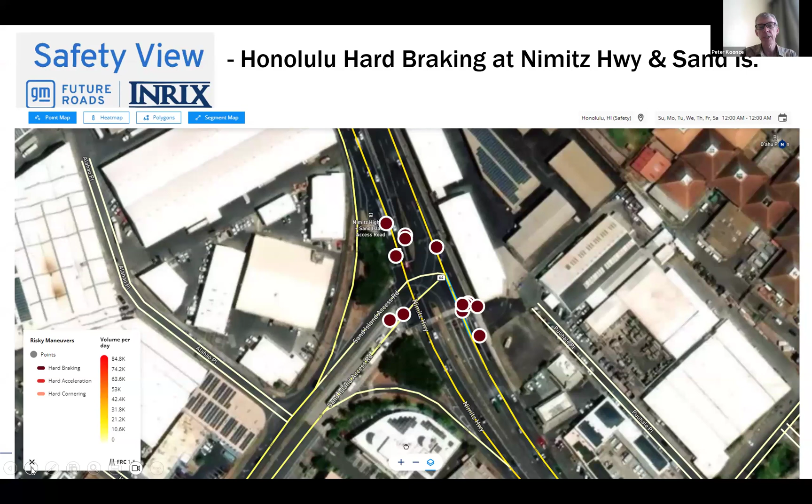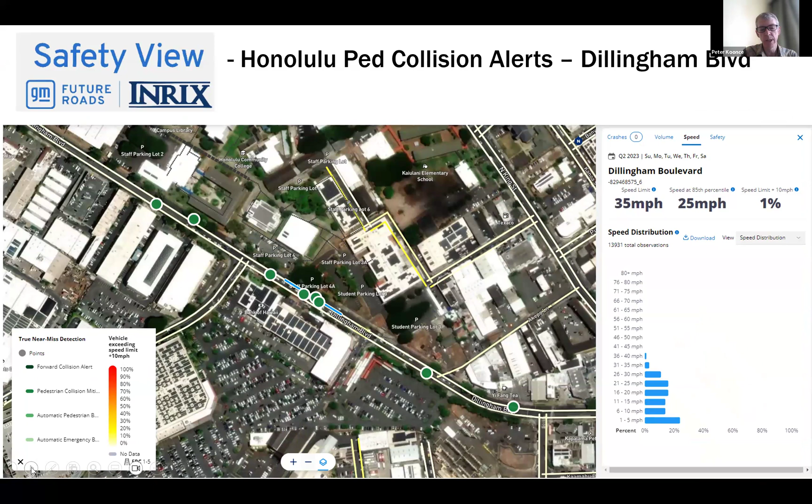The other interesting part about that is the data that comes out of autonomous and connected vehicles. So we're pretty excited about watching this and seeing how we might use that to benefit our intersection treatments in the future. The notion of where speeds are too high and how we might address that with changes to the roadway is just another one of those gee whiz moments where I think there's some fantastic opportunities to advance pedestrian safety if we have better data about what the conditions are and where risks are highest.

The NTSB report talked about that. And so this is something we're pretty excited about: the work that the National Committee did to look at this document, set up a task force, and then rewrite the language in the speed limits chapter. So section 2B, if you haven't looked at that yet, actually, I think NACTO has a webinar on this that's going on right now.

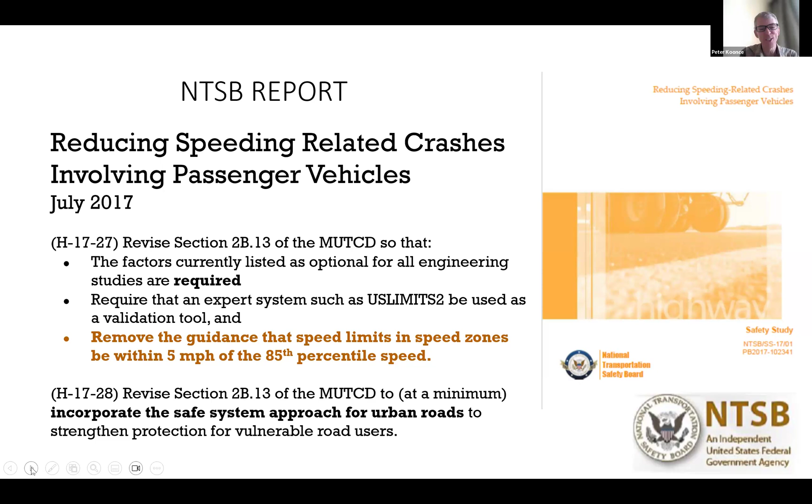So if you are thinking about working with your engineering community or actively working with them, ask them to take a look at the speed limits and think about updating some of that information on the streets and as you go about your daily work. Because that can be huge in terms of improving pedestrian bike safety. Thinking about how, again, we use the language there that provides more flexibility, increases consideration for pedestrian and bike travel.

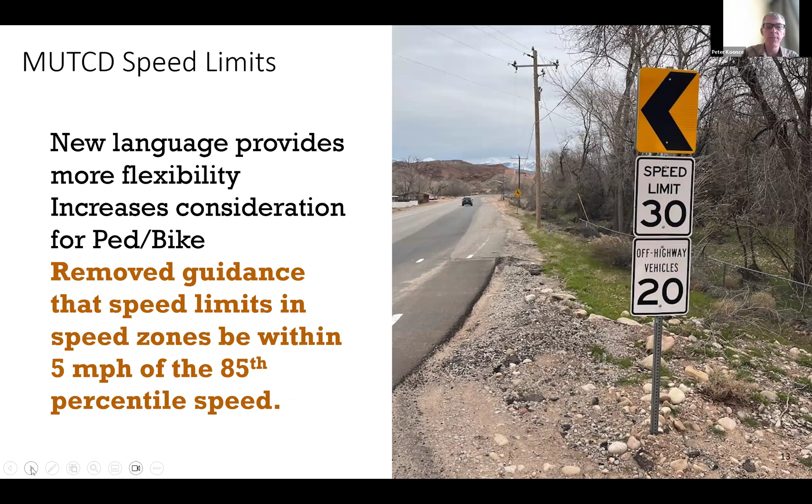This notion of how we go in the future to address issues, this notion of bike lanes shall not be to the right of a right turn only lane, that's an issue that's still being resolved. If you think about the nature of this sort of a treatment, in this example from Portland, where we said, oh, wait a minute, this striping, it's a mistake that runs in violation to the MUTCD. But what we found when we did more investigation is that we didn't really have a strong basis for why this is the case and why a bike lane to the right of a right turn lane would be banned in all cases. If that's a low volume movement, maybe that's an okay treatment.

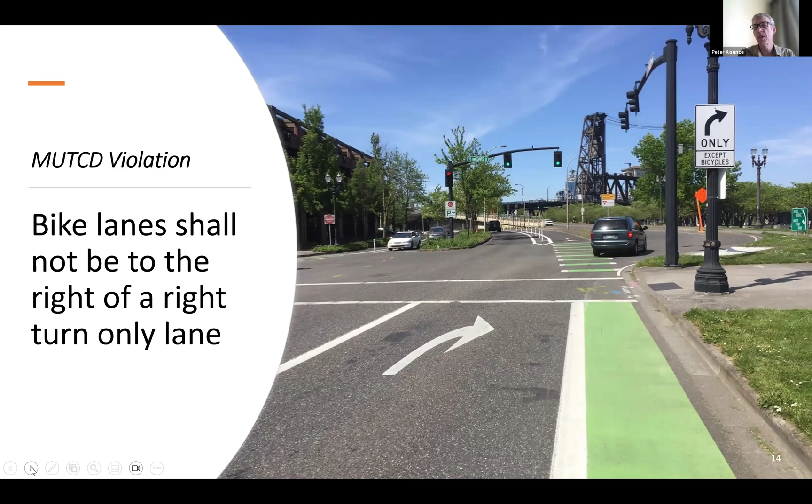So thinking about challenging the status quo, at least thinking about, can we do an experiment to address whether this bike lane treatment that's a pocket right turn lane, is that truly the safest application that we can think of, or does that then impact the comfort of our users? Here's a compliant example where, again, the bike lane is adjacent to the vehicle traffic, sandwiched between the bus and the vehicles. Is that the right design that's going to get us to our multimodal goals and improve safety for all? I think it's still a question that's worth further exploration.

So again, just to set the stage for a series of great presentations, I want to just reflect that if you think about Portland and our climate action plan, I like to say that the MUTCD may not reflect local policy. It doesn't get us to where we're going. PROWAG, huge issue for us. We're going to watch that very closely, and there'll be more on that in the coming months and years. And then again, this notion of there's some bias. I like to say cities aren't always involved in the research, so we have to work with our partners. And we've been very active with Oregon Department of Transportation, and they've been very supportive to moving a multimodal safety effort forward. That's the end of my presentation.

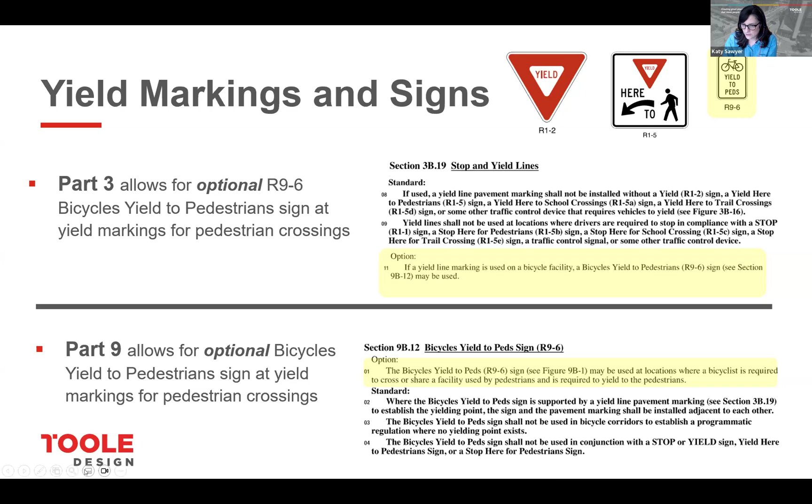So Part 9 now allows practitioners to use a smaller yield to ped sign on those bikeways. And you'll find that both in Part 3 for stop and yield line markings, and then it's also included in Part 9 as well in the bike section. And the draft 11th edition included how that may be used. So a transit island is a great example where you would be expecting a lot of pedestrians to be crossing the bikeway, and you really just want to let bicyclists know that they should be yielding. So now you can use this optional yield to ped sign.

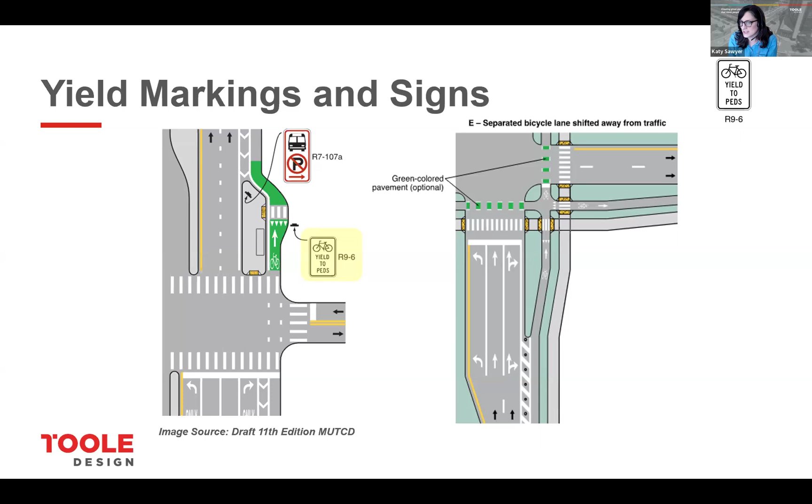That will also impact the design of protected intersections as well. A protected intersection is shown in the 11th edition. However, it's largely silent on how you may treat things like the assignment of right-of-way and traffic control as well. But if you live in a state that allows that yield condition at crosswalks and not stop, you could also use these yield to ped signs at those protected intersections.

Another change, one of the good things is Part 2 does add bike symbols to the yield or stop here to pedestrian sign. So practitioners can use a single sign to alert motorists to yield to both bikes and peds when you have that bike facility present. The bad news is that Part 9 does not incorporate that bike symbol into the turning vehicles yield or stop for pedestrian signs. A lot of agencies across the country have been wanting to combine the bike and ped symbols on that sign. Many are, whether through the request to experiment process through FHWA or just doing that on their own. Obviously, these typically get mounted at an intersection that has a lot of sign clutter going on already, and so you want to try to consolidate those signs to the greatest degree possible.

Part 9 allows for the use of this new sign, the left turn yield to bikes, down at the bottom of the screen. So you do have the option of adding an additional sign, but unfortunately combining those symbols at this point, you'd still have to go through that request to experiment process.

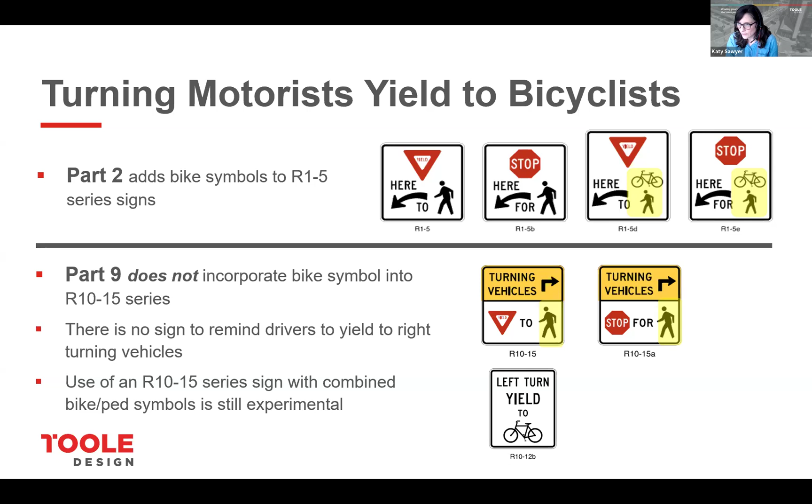As Peter mentioned, the right turn lanes to the right of bike lanes, the 11th edition does require you to phase separate any bikeway that is to the right of a right turn lane. The draft edition actually made it so that for a separated bike lane, it advised against it, but it didn't necessarily preclude it. The 11th edition has revised that draft language in such a way that it's slightly ambiguous, and the problem lies in the definition section of the MUTCD, where a separated bicycle lane is considered a subset of a bicycle lane. So when you look at the language in Chapter 9, it really says that for a separated bike lane, you can't have a right-only lane without phase separation. So something for practitioners to be aware of.

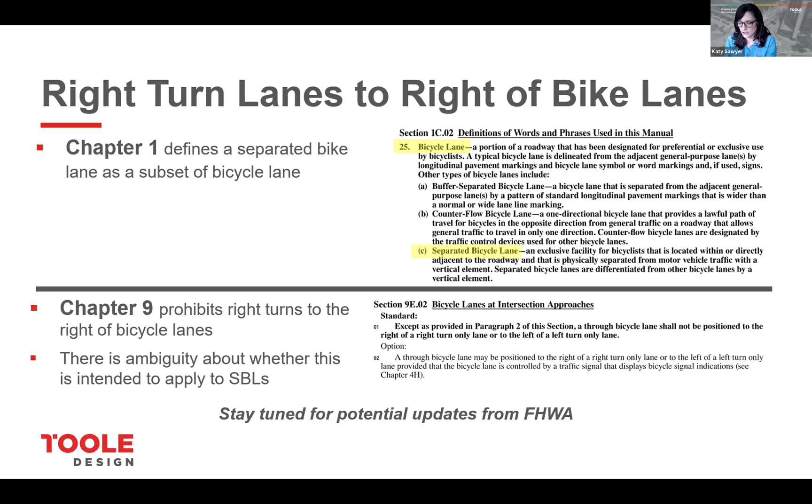I know the National Committee, as well as other sponsoring organizations, are very well aware of this, and I do think FHWA will be issuing some sort of interpretation of this language, or maybe even a revision to it at some point in the future. I can't guarantee when that will be, but it's certainly on everyone's radar that this was a change from the draft edition, and trying to clarify whether that was intentional. Good news is that when you do provide a right turn lane, when you have that space to provide the right turn lane to the right of a bike lane, these scenarios are now in the MUTCD.

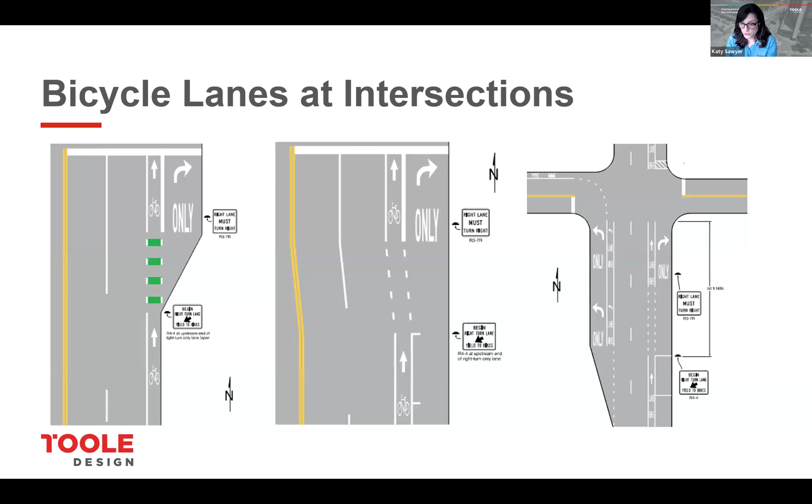So you have those standardized pavement markings and signage and guidance about what sort of traffic control to use in those situations. Buffered and separated bike lanes. Separated bike lanes has been added to Part 9. It's a kind of minimal section, I think, but also the MUTCD is not a design manual, so sometimes less is good to allow designers the flexibility to design bike facilities that they feel are safe and serving all modes.

One thing I will point out in the separated bike lane section is that there is a standard statement that requires that along a separated bike lane, you do restrict all right turns on red. So that's something that's important for practitioners to remember.

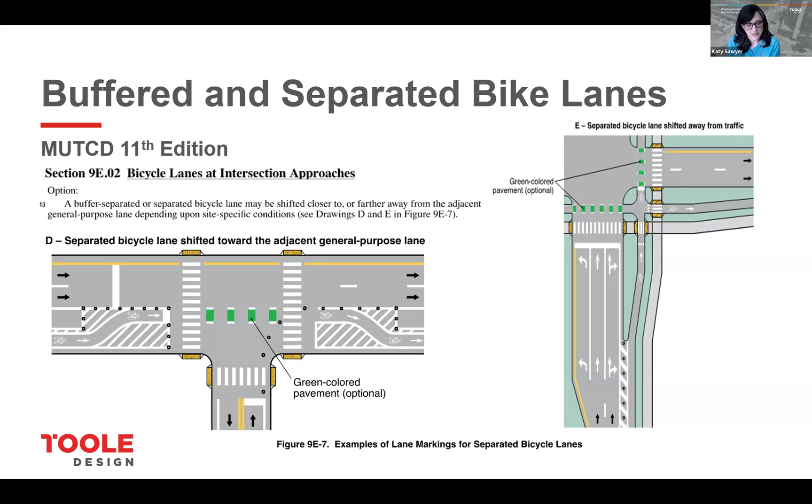And one thing that I thought was a little interesting, there's a section for bike lanes at intersection approaches, and it says that you can bend a bike lane in or out, meaning you can bend it in towards the travel lane or out towards the edge of roadway. And we know that they're not the same type of treatment. It's not a design manual, so there's no information on this, but as practitioners, we do know that there is a huge benefit to bending bike lanes out.

An offset of 6 to 16.5 feet has been shown through research to really improve the safety for bicyclists. It reduces those crashes. And so I think it's important to note that while they're kind of presented as you can do either or, practitioners really need to remember that it's important to maintain and maximize that buffer space between bicyclists and motorists to allow motorists more room to yield. And I think an important thing too to note is that you should be looking to the latest design guidance and not necessarily just the MUTCD on its own when you're trying to design these sorts of facilities.

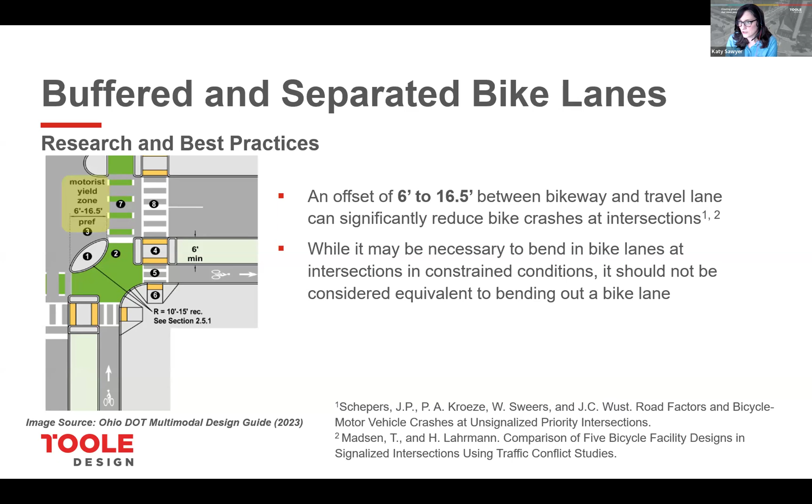Green colored pavement markings are no longer an interim approval. They've been incorporated into the 11th edition. I know a lot of people were waiting with bated breath with shared lane markings and how they could be enhanced. The state of California in particular has a long history of requests to experiment regarding the green-backed sharrows, shared lane markings, or super sharrows. And so a lot of people were waiting to see how FHWA would incorporate those. And this one, I have to admit, came out of left field a little bit. You can now use black pavement markings underneath your shared lane markings.

This example from here in Pittsburgh, I think you can see when you have an asphalt street, if you were to provide black pavement markings under a shared lane marking, motorists probably aren't going to really pick that out compared to just the white pavement markings. From a maintenance perspective, it may last longer, so that's good. But I will say this was kind of a surprise.

I'm not aware of black-backed shared lane markings anywhere in the country. I'm not familiar with any research around this practice as well. And I suppose if you really wanted to, you could request to experiment with the green-backed sharrows still. But I think FHWA has likely made their opinion pretty clear here that they are not in favor of the green-backed shared lane markings.

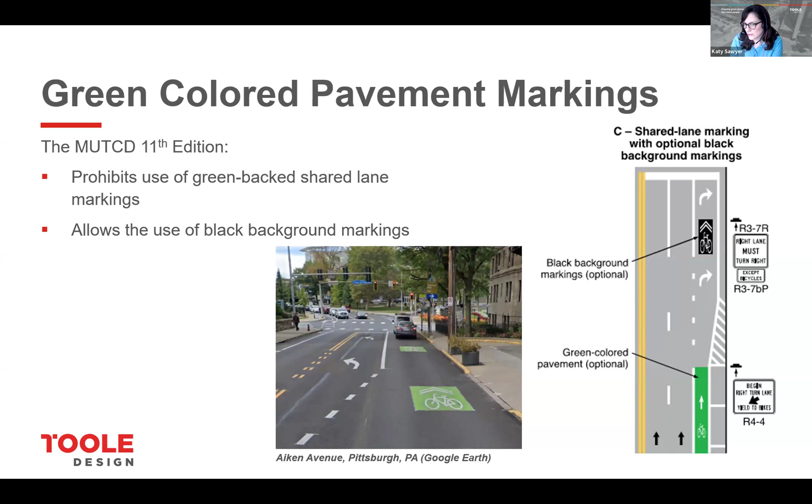Bike boxes have made the jump from Interim Approval 18 into the 11th edition. One thing from that interim approval that made its way over is that when you use that bike box across multi-lane approaches, ostensibly to get bicyclists to a left turn lane, you must have countdown pedestrian signals. That has stuck out to a lot of people for that interim approval. But I will say, I also think in that scenario, practitioners are installing two-stage turn boxes instead of extending the bike box all the way to the left turn lane. But that's something important to remember when you're using that treatment type.

Some things that are new that weren't in the interim approval is that since you're moving the vehicle stop bar, the general travel lane stop bar, away from the intersection, you must recalculate your yellow change and red clearance intervals, which makes sense, but it wasn't included in the interim approval. So make sure that you're looking at that when you are installing bike boxes at a signalized intersection.

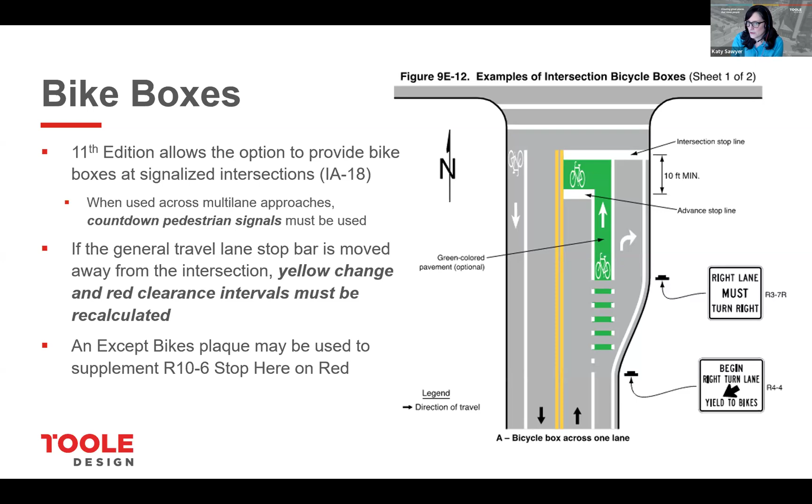And then another thing that's new too, I had never really thought of this as being an issue before, but if you have that vehicles stop here for the stop bar, you can now put an except bike plaque underneath that stop here on red sign. It's interesting to me because without the advanced stop bar going across the bike lane, I don't think that there would be a confusion about where bikes stop, but you have that option if you like. And then also two-stage turn boxes have made the jump from Interim Approval 20.

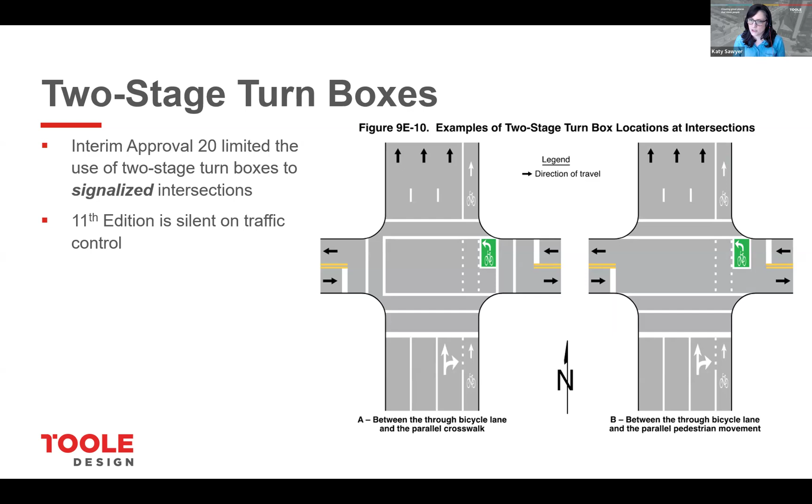And for interim approval 20, it explicitly said you could only use them at signalized intersections. The 11th edition is silent on traffic control. And I think that's intentional. I think that we're seeing these two-stage turn boxes used in a lot more scenarios than just signalized intersections. As we start to incorporate more two-way bike facilities, we can use these to get more creative on how to get bikes into and out of those facilities.

This is a section that took me a little while to digest and really understand, but two-stage turn boxes live in both the marking section and the sign section in Part 9 because they do have both of those pavement markings and signage. The signage section to me is a little confusing, but ultimately what it comes down to is that if your bike facility is approaching an intersection where the general travel lanes can't turn, you need to let bicyclists know that they need to stay in the bike lane.

So in those scenarios, you are required to use the R9-23 series signs, and they are very specific. There's a specific advance sign that you need to use, and then you need to use two different signs at the near side of the intersection and the far side of the intersection. If turns are allowed for everyone at the intersection, bikes are obviously permitted to leave the bike lane and take a left turn lane, for example. So these signs become optional.

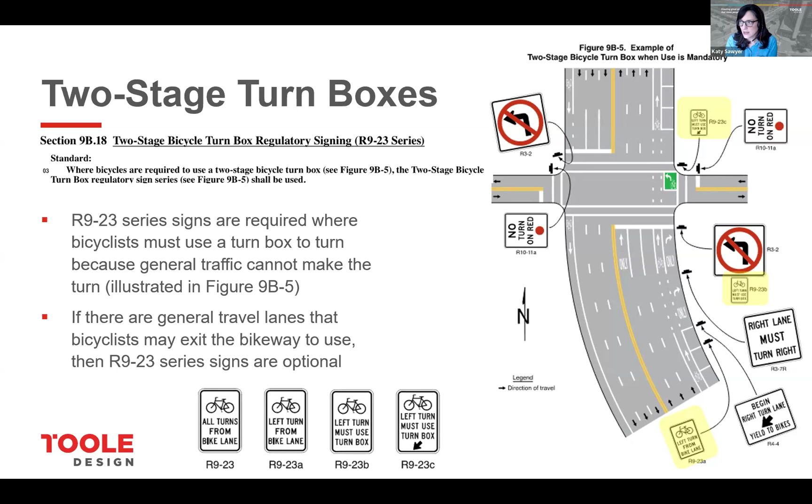This figure kind of helps with the text. It's an interesting case because I think if you have a 6-lane arterial street, it's questionable that you would have a conventional bike lane. So sometimes that can be a little overwhelming. But I do think the figure helps when you're reading the text to really understand exactly what the requirements are here. And then interestingly, right after that section, there is a new bicycle jug handle section.

Again, I wasn't really aware of this being an issue in the past, and it's a very large, kind of confusing graphic with a lot going on. Ultimately, they're talking about, like this example here in Pittsburgh again, a bike bay. You have a T intersection and you need to have some space outside of the roadway where bikes can turn to be able to use a signalized intersection.

In this case, the section actually says that if bikes are required to use this turn box, this two-stage movement, the signs are optional. So even though it's kind of the same scenario as a two-stage turn box, it's a different requirement. Also, interestingly enough, they have, I actually need to count them, 2, 4, 6, 8, 10, 11 regulatory signs to control this very specific situation. So I thought that was pretty interesting.

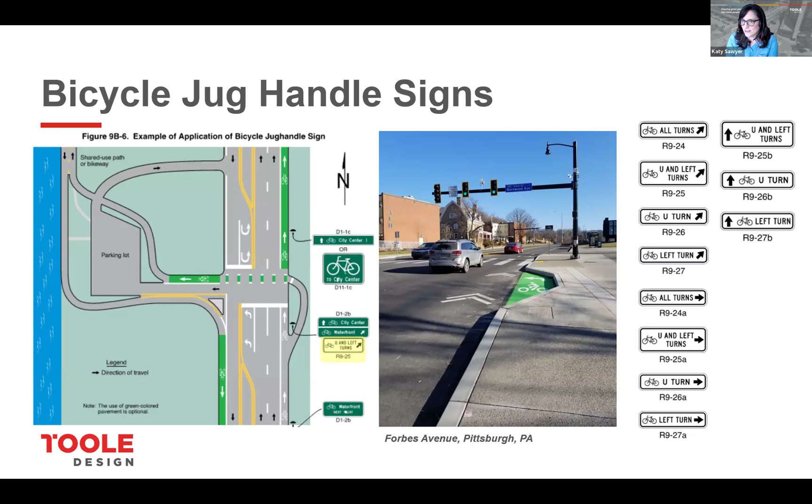And then finally, counterflow bike lanes have been incorporated, which is a huge win. But there are some issues, I think, or maybe some missed opportunities here. The first one is that I know a lot of agencies, when they install a counterflow bike lane, they like to take those existing one-way signs and put an except bikes sign underneath, especially in an urban environment where you have a lot of sign clutter and utility conflicts and you're not sure where to put new signs. That is really the easiest way to accomplish alerting motorists and bikes of how the traffic operations work.

Part 9 requires you to use movement prohibition signs. So you have to put that no left or no right except bikes. And then Part 2 has the one-way signs. And when you think about it, these have to overlap essentially when you install a counterflow bike lane. So it's really going to contribute a lot to that sign clutter.

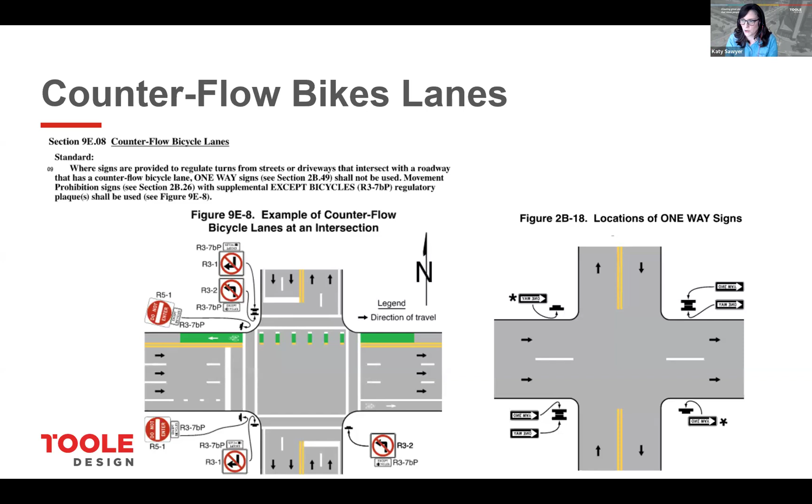Interestingly enough, again, Part 2 allows for the use of an except bikes plaque under the one-way signs, but Part 9 specifically prohibits that. So there's a little bit of conflict there. I think maybe FHWA's philosophy might have changed at some point, but Part 9 does prohibit the use of that except bikes plaque under the one-way sign.

And then finally, for counterflow bike lanes, this one was really disappointing to me, but FHWA is advising against putting a counterflow bike lane between a parking lane and a general travel lane. It does not explicitly prohibit it, but it really advises against it.

And I think that's a missed opportunity because these facilities, especially in a bike boulevard scenario on neighborhood streets, are a great way to get these facilities in to allow bikes to travel through a neighborhood. As far as I know, there's hundreds of these installations at this point, and I'm not aware of any safety concerns with them.

And I also know agencies are looking for standardization of these pavement markings. You often see the double yellow dashed lines to allow motorists to access parking. And obviously, since bikes are traveling in the door zone, but they're in full view of the counterflow parked vehicles, you can really understand why safety concerns with dooring and things like that maybe aren't founded. So it doesn't prohibit you using this, but it does certainly advise against it.

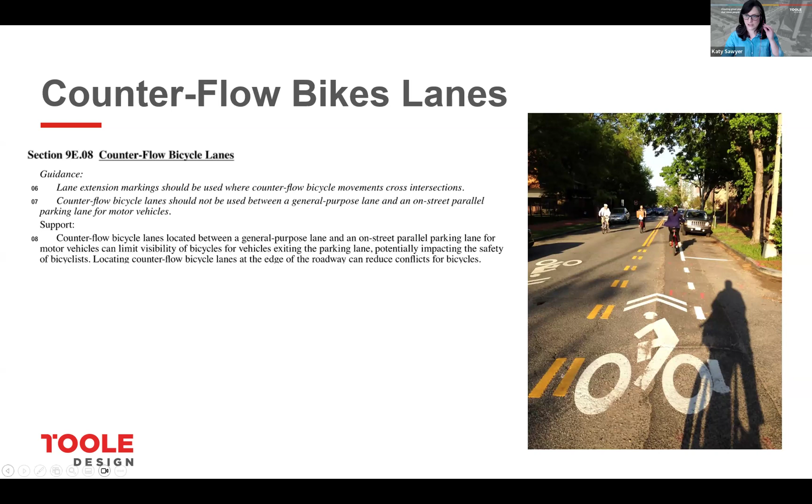Good afternoon, everyone. I'm Jerry Schippa, City of Madison Traffic Engineering Department. As the introduction said, I work in traffic signals and lighting, and I wanted to present on some opportunities in the new edition on the traffic signal warrant front and some on bicycle signals. And I know Matt's going to cover that more, so it'll be a good transition into his presentation.

So there's a few changes regarding crash warrants and some of the charts, but I think the biggest change to the manual is changing the standard language that references, in this case, table 4C1 for the 8-hour vehicle warrant, changing that from standard to guidance. And what we heard from the FHWA is that they want to reinforce the idea that we are to use our engineering judgment. This is a good tool to get an idea for when a signal is warranted or not, but there's going to be local considerations, and you're going to have your experience and lived experiences nearby, so I think there's a real push to bring it more into the guidance rather than a standard.

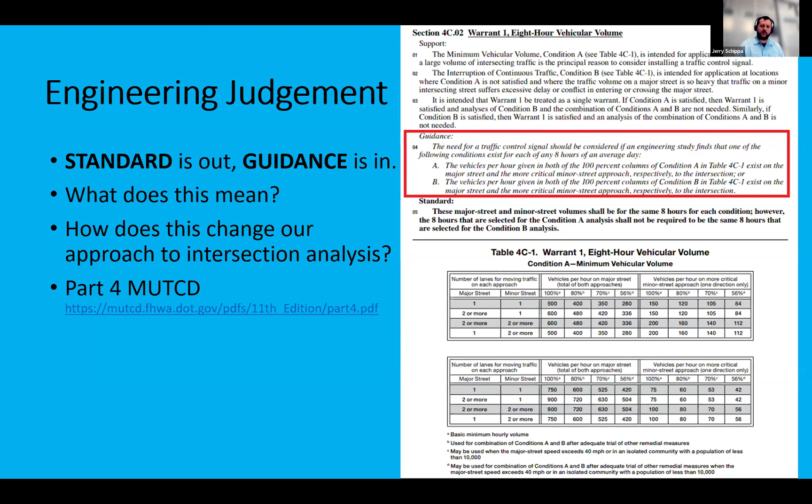So what does this mean, and how do we evaluate intersections? Just to get our brains going on this, imagine we have a main arterial street in our city that's 2 or more lanes per direction. So it could be a 4-lane divided highway or a 6-lane divided highway. You might have high traffic volumes, several thousand vehicles per hour for most of the day. And maybe you have high speeds on that. It's posted 35, but the 85th percentile speed is over 40 miles an hour.

And the side street is a local or a small collector street, maybe single lane. Maybe you've got some land use where there's some desire to cross, but there's not enough vehicle or pedestrian volume to meet a warrant, but it's not nothing. It's probably not that hard to imagine this scenario. We've probably got a bunch of those intersections. As a matter of fact, tonight we have our annual traffic signal priority list going to our transportation commission. I looked at that list, and this scenario makes up 20% of the intersections.

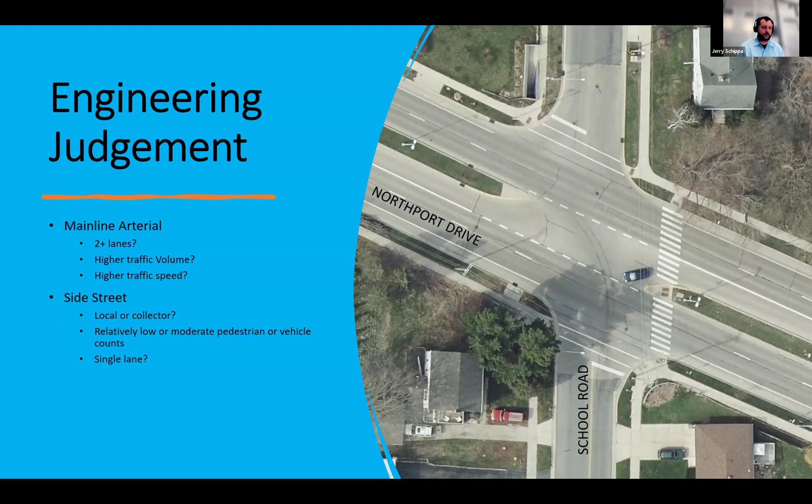And if you're like us, some of these intersections are far away from other signalized intersections. And if we apply the signal warrant and say no, there's not enough pedestrian crossings, not enough vehicle crossings, we're not going to put a signal there, it doesn't meet warrant. If we are really only saying no because it doesn't meet warrant, what are we telling people? We're telling people, if you want to cross the street safely, maybe you're having a hard time finding gaps, or you just don't feel like that's a risk you want to take, either get in a car and drive, or walk. It could be 15 minutes out of your way just to cross 80 feet.

So operationally, what does that say? That's saying one person's 15-minute delay is more important than other people's potentially 31-second delay. So 15 divided by 31, are we going to stop 28 drivers for the full duration of that crossing? And maybe are there other users that might benefit, like side street drivers that have just given up on using that intersection?

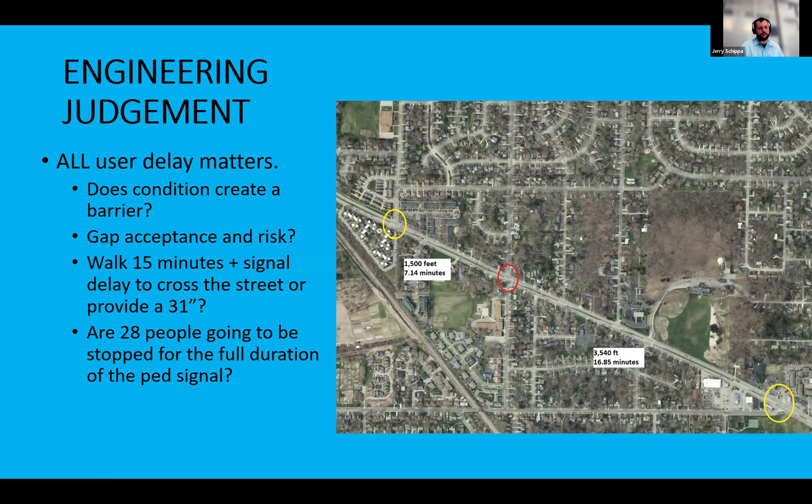And some other elements kind of about engineering judgment are: what is the geometry of the intersection? What if we reimagine that geometry differently? What does the MUTCD signal warrant say about that? It doesn't really give us much guidance there, so we kind of are left to use our own imagination.

So in this image, we had a fairly high crash problem. We could have plopped down a traffic signal, but instead we did some geometric changes and got rid of some conflicts. Technically it didn't meet any of the signal warrants, but we installed the signal anyways because we saw an opportunity to add a signalized pedestrian crossing. It would serve well with the neighborhood bikeway; there's a Target to the south side and a neighborhood to the north side with a bike path. So there are just different things to consider, because not all signals are the same. Not every intersection is the same.

And then on top of this, how would you time this signal? What are your priorities? In the lower corner is not this signal, but another similar signal. When we first started these, we timed them to be perfectly coordinated for drivers and found out nobody liked them. They ended up waiting in the median for half the cycle, so you ended up with like a 1.5 cycle delay. Well, we can time these differently. So timing of signals and geometry of the intersection, it all comes together, but it's outside the MUTCD warrant analysis.

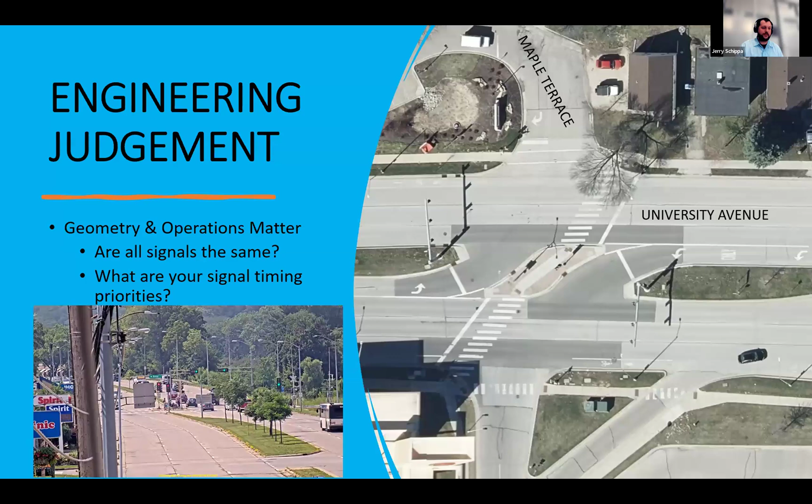And then other devices. In this case, we have an intersection where we were told no by the state, that we could not install a signal. The yellow circle is a signalized intersection on East Washington Avenue, which serves as US 151. Just to the south, one block, about 400 feet away, is a parallel route. East Washington Avenue is not that great to bike on, but we have a bike boulevard one block to the north, and we thought, let's maybe start turning the block south into a bike boulevard. And no, it doesn't meet signal warrant, even though we have a fair amount of pedestrian crossings here. We had a fair amount of crashes that could have been corrected by a signal.

And we had that signal queue backing through the intersection, which causes people to start crossing in between stopped vehicles, which is a dangerous scenario. But no signal because it doesn't meet warrant. So instead we install an RRFB, because there's also concern about operations. But a signal can be coordinated. A PED hybrid beacon can be coordinated, though there's some evidence that shows maybe you want to pay attention to PED delay on that. But an RRFB has to be on a hot button. So it was kind of weird to get feedback that no, we're concerned about operations, so put in a device that can at any moment, in theory, stop traffic.

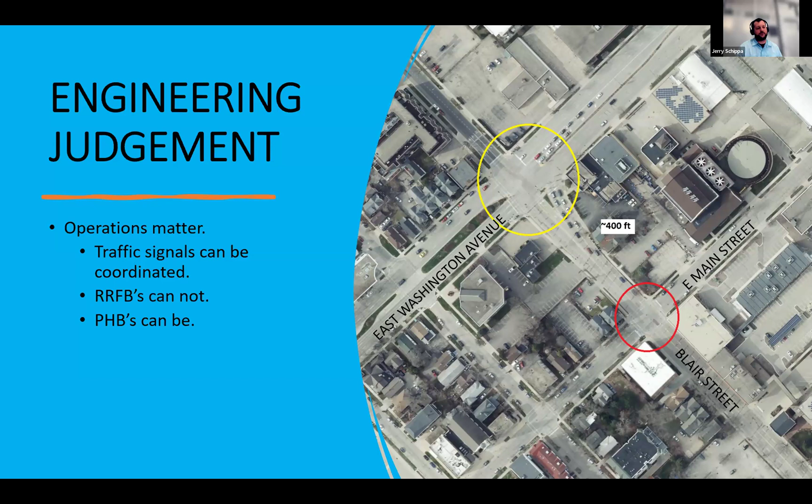So here comes that dual left off a green, and we stop traffic with an actuation, or drivers are seeing a green up ahead, and now we have an RRFB showing them maybe they should stop for the pedestrian in the crosswalk. So again, another engineering judgment is: does this meet warrant? And if no, maybe there are some other considerations, some other context that you might want to consider.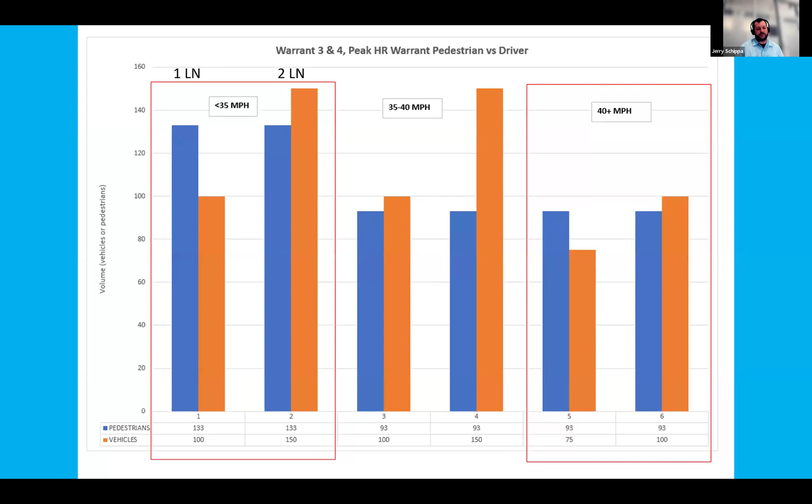And those are good, but it creates a situation where, on a 40-mile-an-hour arterial, we need 93 people crossing on foot and we need 75 in a car. And there's no consideration for what if I have 92 on foot, and what if I have 74 in the car? Well, no, both of them don't meet, no signal. This is where engineering judgment comes in, and we have to start thinking there are some more considerations to take into account.

And I want to highlight this too. This kind of bothers me as an engineer that has to go in front of the public and in front of commissions when it comes to the traffic signal warrants, is that there's no citation in this manual as far as where do these numbers come from. So when we say, no, it doesn't meet traffic signal warrant, and someone says, well, where does that number come from? I'm sure someone did a study at some point, but I don't know where to point them to.

I don't know where some of these numbers come from. Some maybe have just kind of always been there and have been iterated on edition over edition, but you'd have to dive through probably decades of paperwork just to try and track the changes and see where and why that might have happened. But there's no easy reference, like go look at this study and this is where that number comes from.

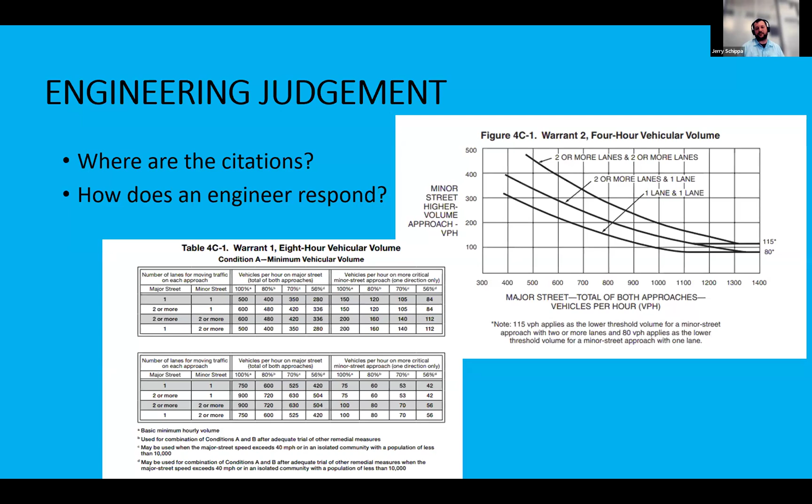So leaving the signal warrants aside, and again, kind of to wrap that idea up, is just really taking into account context. And I think as we analyze intersections and we rely more on engineering judgment and less on a flow chart, you're going to really have to make the case for a signal. You're going to have to evaluate it, show operationally, show all the possible geometric changes. But I think by doing so, we're going to have a much better idea of what the final operation is going to look like and what potential is really there.

So bicycle signals, like I said, I'm not going to go into too much depth because Matt's going to take this and go deeper with it, but it is now in the MUTCD. Something I've heard in the past is why include bike signals? Is it just kind of bells and whistles for bikes? But my opinion, the answer is no. This is actually a huge operational benefit.

In this picture, we've got a 125-foot crossing. We are required to have a near side bike signal per the MUTCD. But just crossing the street, who takes longer to cross? Someone walking or someone biking? Oh, just have the bikes push the ped button. Well, now that's going to stop traffic for 42 seconds versus a bike signal, which could be timed more appropriately for bikes. And we only have to give them maybe an 18-second phase. So it can really actually matter quite a bit when it comes to operations, as well as added safety.

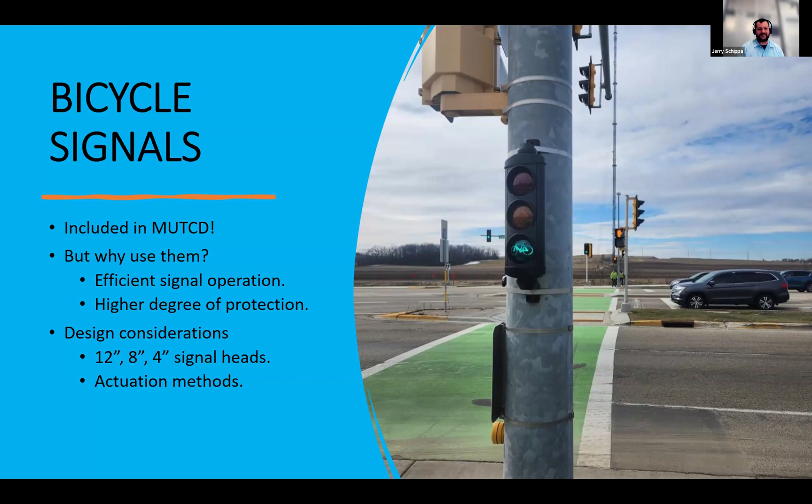So I'm hoping to see more of this in Madison and hopefully see more of it elsewhere. But this can be mounted as low as, I think, 3 or 4 feet. This one's at 4 feet. Or 5 feet. We're gonna go lower to 4 feet next time. But just a bit of a plug for this because I think they're really cool and we've gotten some positive feedback on that.

So that is it for my presentation, and we're gonna pass it on to Matt to talk more about bike signals. Thank you, Jerry. Let me just share my screen here and then we will get started.

All right, so my name is Matt Johnson. I'm a capital project manager and the bikeways coordinator at the Montgomery County, Maryland Department of Transportation. I do want to note that any opinions expressed in this presentation represent my personal views and do not represent the Montgomery County Department of Transportation or the National Committee on Uniform Traffic Control Devices.

So at long last, a new manual. This has been long overdue. We've been waiting for this for a very long time. The 2009 manual was in effect for 14 years. And so we finally got the new manual, and I was like a kid on Christmas when this was released.

I opened it and I went straight to the bike signals chapter. There were some big wins in this, and I'll talk about some of those. And there's also some disappointments and things where we didn't get what we wanted, like the bike signals chapter, which was really kind of a gut punch for me. We have challenges, but we also have opportunities, and so we'll go through that.

I think one of the first wins we have here is the new principles statement. So I'm not going to read all this text, but you can feel free to go to the manual and look at this. But basically, in the 10th edition or the 2009 edition, there's no mention of vulnerable road users. But if you go to the 11th edition, right here in the very first section, 1A01, the purpose here is achieved through the following, one of which is to promote safety, inclusion, and mobility for all users. So no longer can you pretend that the manual does not intend for our road network to be safe for everybody.

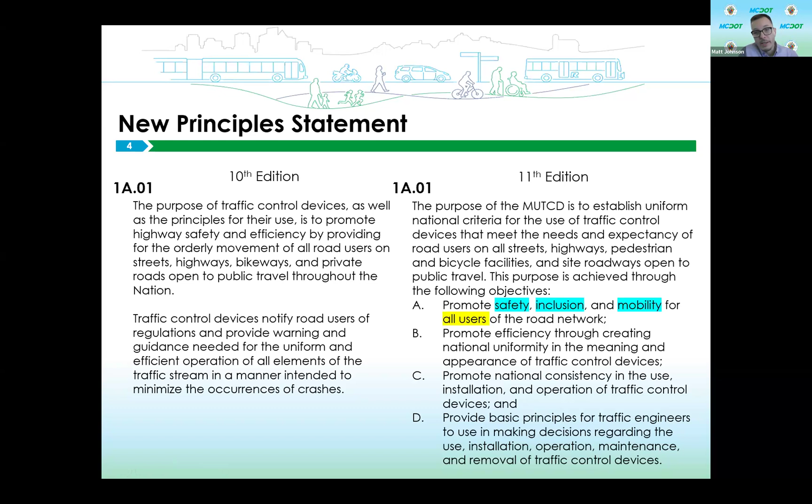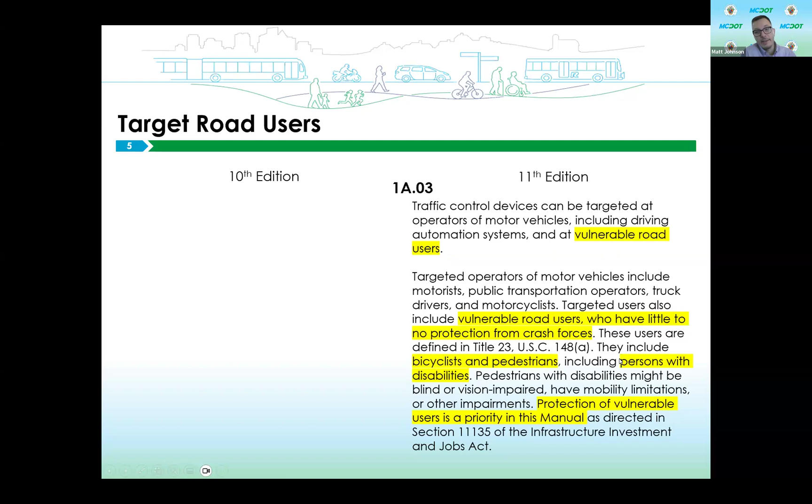Target road users is also a new section. You can see in the 10th edition, there's nothing here. In the 11th edition, we have, again, another note that we need to be focused on vulnerable road users, and that vulnerable road users have very little to no protection from crash forces. And these users also include bicyclists, pedestrians, and persons with disabilities. And the protection of these vulnerable road users is a priority in this manual. So again, we can't pretend that the manual is not supposed to be protecting people who aren't in vehicles.

Peter already touched on this, so I'll kind of breeze through it. But in the 10th edition, the manual said that the posted speed limit should be within 5 miles per hour of the 85th percentile speed. And I know that in your states, like in my state, people treat the speed limit more as a guide than a rule. And they say, oh, I'm only going 5 over, I'm only going 7 or 8 over, I'm probably not going to get a ticket. In the state where I practice, you have to be going 12 miles an hour above the speed limit before you get a ticket from an automated camera. So that's what people basically have treated the new limit as.

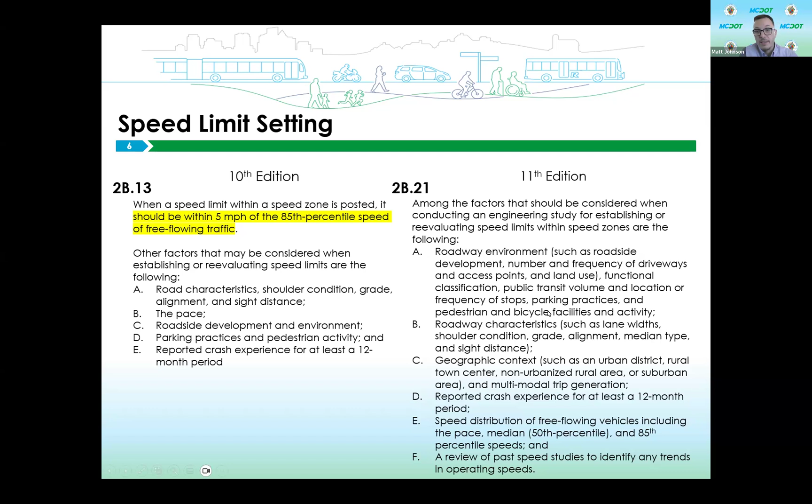And so what happens is over time, speed limits would creep up because 85% of traffic is going faster than the speed limit, so we've got to move the speed limit up. But in the 11th edition, and again, I'm not going to read all this, it talks about how we have to look at a broader context, including the roadway environment, roadway characteristics, the geographic context, a lot of things. And this is a huge win. And I'll also note that it specifically notes that on urban and suburban arterials and on rural arterials that serve as main streets through developed areas of communities, the 85th percentile speed should not be used. And that's huge. This is a huge win.

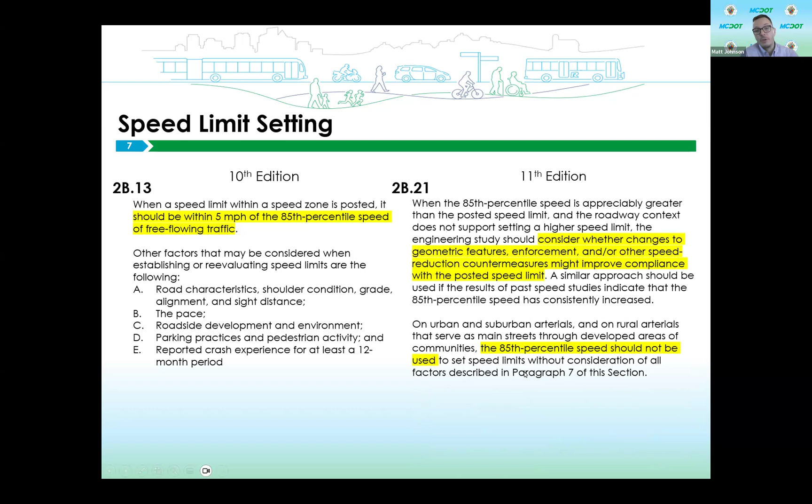And Katie talked about the interim approvals, so I'm not going to belabor those points. The main win here is that when they were interim approvals, it was more challenging for local jurisdictions to use them. In the state where I practice, Maryland, we had blanket approvals from the state for all of these, so we didn't, as a local jurisdiction, have to apply every single time we wanted to use one, but we did have to keep a record of them, and we had to be prepared to remove them, because with all interim approvals, you have to be willing to remove them within a certain number of months after the interim approval is rescinded. If that ever happens, it's rare, but it can happen.

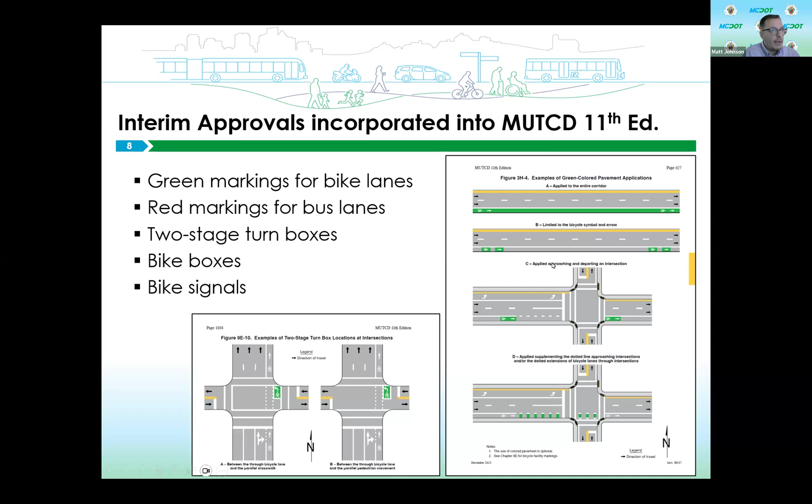And so some jurisdictions just might not have been comfortable spending a bunch of money to install things like this, with the risk of having to spend more money to remove them if the interim approval was rescinded. So it's good that these are in the manual. As Katie noted, there are some caveats to that, but I think generally a win.

Another, I think, potential win, although this depends a little bit on how you read this, is in section 4D03, which, quote, requires jurisdictions to consider the needs of bicyclists along bikeways. And I'll note that bikeway here is a defined term, which is a generic term for any road, street, path, or way that in some manner is specifically designated for bicycle travel, regardless of whether such facilities are designated for the exclusive use of bicycles or are to be shared with other transportation modes.

So that means you got sharrows on the road, you've got a bike route sign, you've got a bikes allowed to use full lane. Those are all roads that have been designated for bicycle travel, and therefore they become bikeways. And that means that when signal timing and actuation is being evaluated, the needs of bicyclists must be considered.

Now, what does that mean? I think a conservative reading of this would suggest that when you're designing your clearance interval, you have to build in enough clearance time for a cyclist to cross. And if you're in center city Philadelphia, where the streets are like 2 lanes wide, you probably don't need much consideration, because the bicyclist is going to clear that intersection just about as fast as the car is going to clear.

But if you're out on Las Vegas Boulevard where you might have 8 or 10 lanes of traffic, a bicyclist who's entering just as the light turns yellow is going to take longer to clear, and you don't want to be giving green signals to the cross traffic if you have cyclists still in the intersection. So a conservative reading would say, well, we've at least got to make sure that the clearance intervals are sufficient for bicycles.

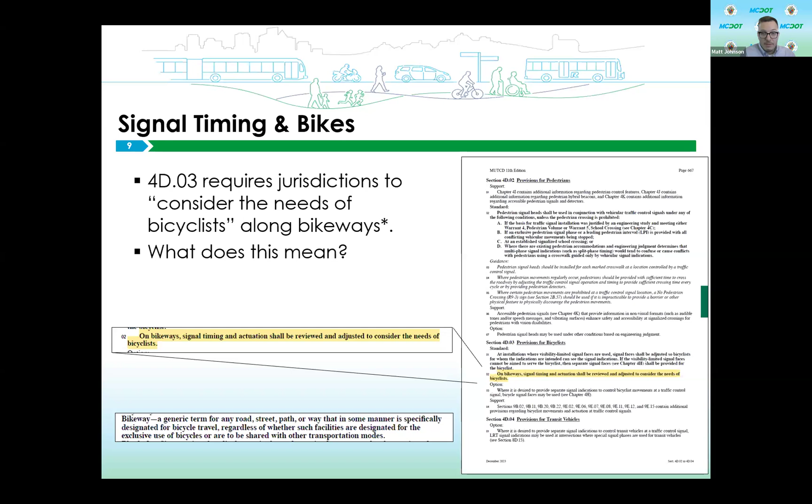As Jerry mentioned, I'm going to talk a bit about bike signals. These were an interim approval. They're now in the manual. The NPA that was proposed back in 2020, the Notice of Proposed Amendment, had a pretty significant liberalization around bike signals in it, but none of that was incorporated in the final rule in the 11th edition. And so this makes it really difficult to use bike signals.

You can basically only use bike signals when you have an exclusive turning movement that's phase protected from the bikes, or you have an exclusive bike phase, like maybe a diagonal crossing, or you temporarily separated the bikes where nobody goes except for the bikes. But other than that, it's really difficult to use a bike signal because you can't have any conflicting movements.

So one of the things that we know is a great treatment for pedestrians is the leading pedestrian interval. It's a proven safety strategy that if you let pedestrians get established in the intersection before turning traffic is released, it improves yielding behavior and it reduces the risk of crashes. However, we can't do the same treatment with bicycles, even though we know that it's also a treatment that will work for bicycles, because some jurisdictions have actually implemented this.

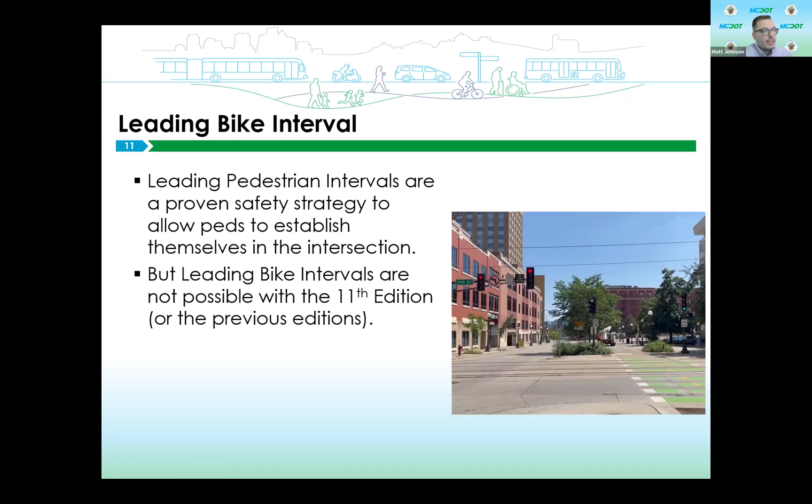That's not possible under the 11th edition. This was a request to experiment, which is why it's possible in St. Paul, but it makes it very difficult to use these. And it's kind of nonsensical because if we use this sign right here that says bikes use ped signal, you can have a conflicting movement with a bike lane and crossing a right turning movement. And so that's one way you can do a leading bike interval, but you can't use bike signals.

And part of the problem that Jerry kind of alluded to, not just is that if we care about the timing for vehicles, but in Maryland, under Maryland law, and I'm sure under the laws of if not all the states, most of the states, once that hand starts flashing, legally you can't enter the intersection. So if I say bikes use ped signal, it allows me to let bikes use the leading pedestrian interval, but it also means that they have to stop crossing maybe 20 or 30 seconds before the light changes, even though they might only take 5 or 8 seconds to cross the intersection.

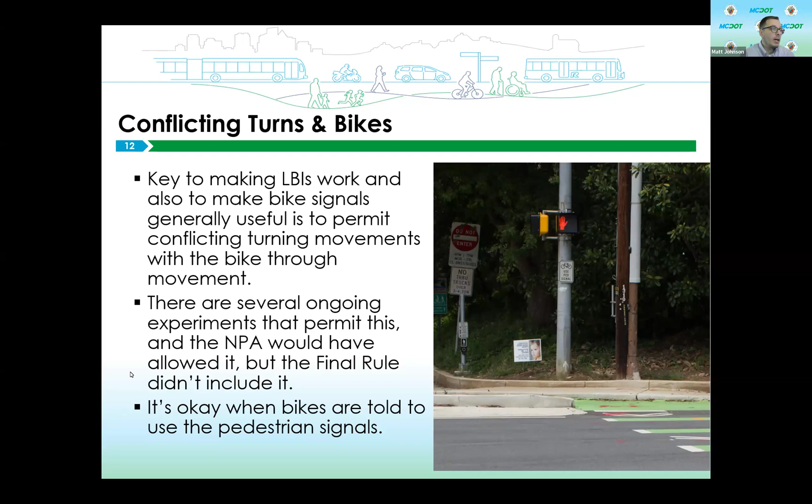Now, that's not a rule that's enforced a whole lot, but technically, we shouldn't be giving people traffic control devices that we know that they're not going to follow, because it degrades the respect for the traffic control device. So this is a factor that I hope is considered when there's revisions. I know that Federal Highway is interested in some more experimentation, and we actually have an experiment that we've applied for. It has not yet been granted by Federal Highway for a project to have that conflicting movement for right turns.

Another thing that's new in the manual is the R10-40 series signs. And these are completely new. They have never been used in the United States. They have not been experimented on. This is something that Federal Highway cooked up and added in the 11th edition. Usually stuff doesn't get into the manual until it's been experimented on quite a bit and there's results, but this is a new thing. And we have some questions about it. One, what's the sign supposed to mean? How are we supposed to use it as practitioners? And how does the general public understand it?

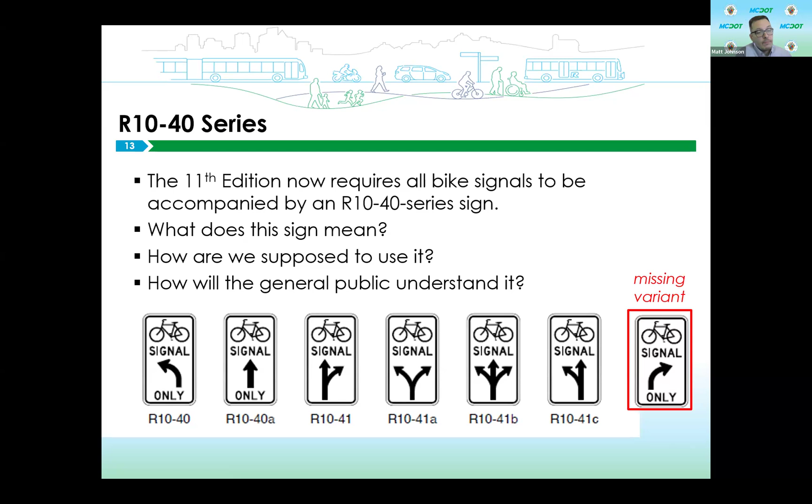And these signs are now required to be posted next to every single bike signal, not every single intersection with a bike signal, but every single bike signal itself. So this could contribute a lot to signal clutter. I'll also note that there is a missing variant. No, not Loki, but the right turn only version of this sign, because there may be some situations where you have a right turn signal for bikes. For example, maybe you have a cycle track on the left side of a roadway, and you govern that right turn. That sign was not created, so there's a missing variant there.

So I actually have a poll question. We'll do a little audience interactivity here. Let me see if I can launch the poll here. I might need some help from Madison here. The view looks different now. Okay, here we go. So the poll's up.

And I just want to point out that this is a uniform manual, so if anybody gets the wrong answer, you won't be able to get your AICP CMs at the end of the presentation. Just so you know, if you get the wrong answer. So keep that in mind. All right, so I'm kidding.

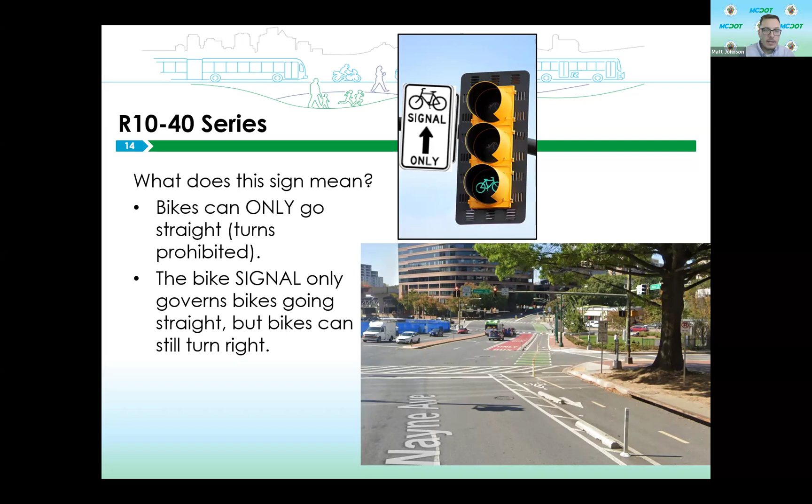Of course, you can get your CMs whether you get the right answer or not, because you know what? There isn't a right answer, or we don't know what it is. And the numbers are still coming in, but the fact is that you get 41%, 42% voting for one, 57 voting for the other. That doesn't bode well for user understanding, right? I'm going to end this poll and go to the next slide. So let's do a bonus question here.

When we have the red bike signal, and Madison, if you don't mind launching the second poll question, if we have a red bike signal in conjunction with the through and right sign here, does this mean that if a bicyclist arrives on the red signal, they can turn right while the signal's red, or do they have to wait? We need the other question launched.

So let's see here. Can I do that here? Okay, here we go. All right, so that poll should be up.

So, because the sign here says through and right and it's red, does that mean I can or can't turn right on red? So again, we're seeing about 50% on each side of this equation. We don't know what the right answer is. So it's exactly 50 right now. So I'm going to go ahead and move on with the presentation, but thank you for voting on that.

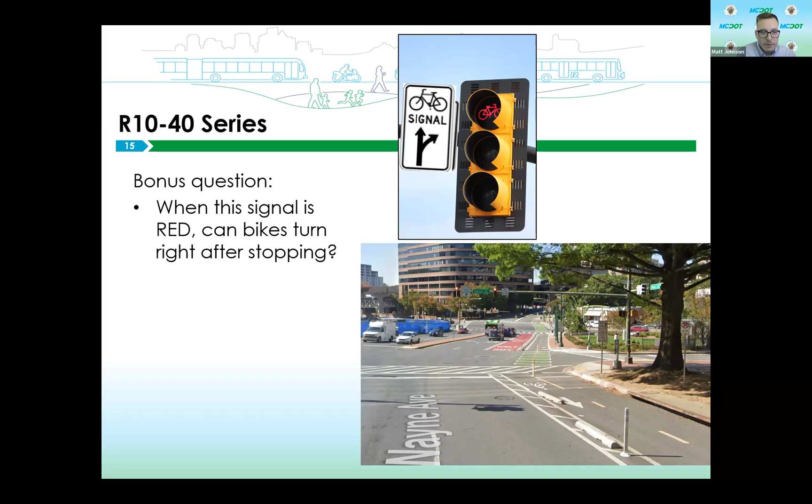So this is an example. This is a two-way cycle track here. This is actually in Silver Spring. This is a project that I built. Please ignore the dislodged concrete barrier there that has been resolved. But if you were making this right turn, and there's not a bike signal here now, but if there were, you're making this right turn at the same time the bike signal is green. Well, the bike signal is not really intended to govern this right turn movement. It's intended to govern the through movement. And we would expect you to be able to turn right here, but we would expect you to yield to pedestrians. But how is the user going to understand this?

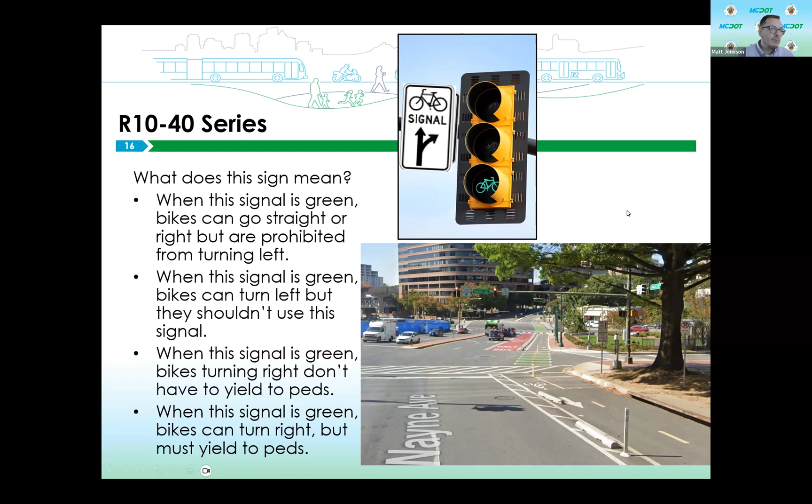We as practitioners, as planners, couldn't come to the same consensus on an answer in this presentation. So how is someone who's biking down the street at 12.5 miles an hour going to have time to interpret that as they're approaching the signal? So I think that these signs are not ready for prime time, but we're required to use them. And it's important that we know, because here's an example of a project that I have in development right now. We're very close to going to construction.

Two-way cycle track, two-way street. We have right turns. For cyclists who are going southbound, which is sort of going from right to left in this image, bikes are allowed to turn right at this intersection, and they're allowed to turn right on red at this intersection. But which sign do I use? The through and the right to indicate that they can turn right? Or do I use the through signal, which might make them think that they can't turn right? I don't know.

And the same is the situation for the left movement here, the movement that's going from the left to the right, which is northbound. Do I use the through only? Keep in mind, there is a two-stage queue box here, so bikes can turn. They use a different signal. Or can they turn left? They are supposed to be able to turn left after yielding to oncoming cyclists. We don't know what sign to use.

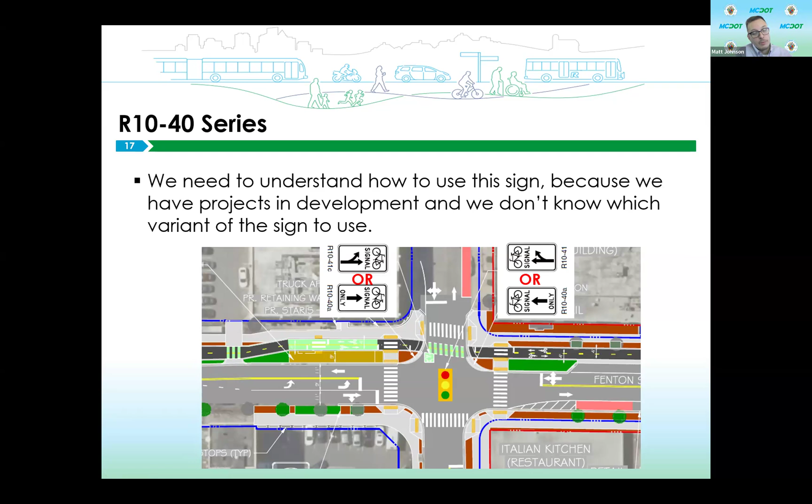And I actually asked some people from Federal Highway at the National Committee meeting, and they weren't sure which was the correct answer. So it seems to me that they had not really fully thought through this sign, but now we're required to use it. And that's a problem because we don't know how to use it and the public doesn't know what it means.

So with that, the last opportunity we have here that I wanted to talk about is the fact, and Peter mentioned this, 32 states currently have either state supplements or state manuals. And those all have to be updated by January of 2026. And this could be an opportunity. Maryland has its own state manual, and it is a fairly conservative manual.

It takes stuff that's in the federal manual and deletes it. Can't use it in Maryland. So this is an opportunity for us to make some positive changes in state manuals. If you have a state like Maryland's that maybe takes stuff out, a chance to get this stuff in the state manuals. And I'm actually on the task force that's working on the Maryland manual, so we'll see what we're able to accomplish. But this is an opportunity.

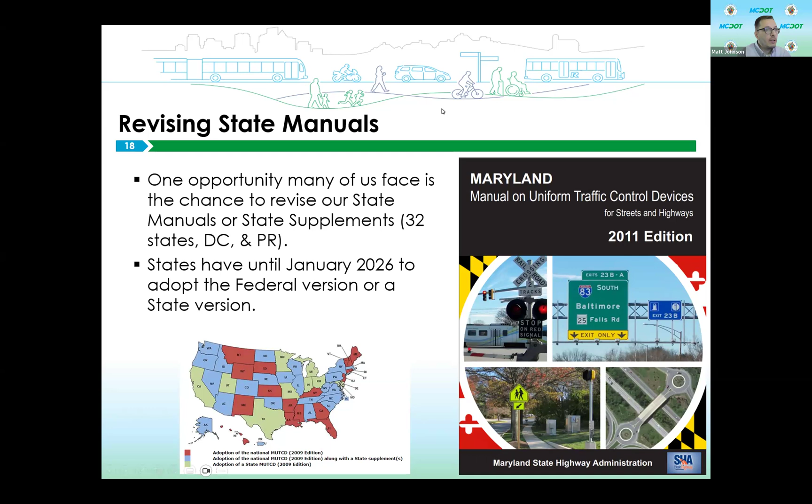So if you're in one of these states that's blue or green on the map, you may have an opportunity to work with your state to adopt changes in your state manual that make the federal manual work a little better for them. And that's my presentation. I think it's time to go to questions.

I think, Peter, are you going to field the questions? That's the plan. Thanks, Matt. That was an awesome presentation. Really hit on a lot of different topics. Love the polls. A little bit confused about the confusion there. I wanted to vote on the poll. I don't know which way I would have voted, actually.